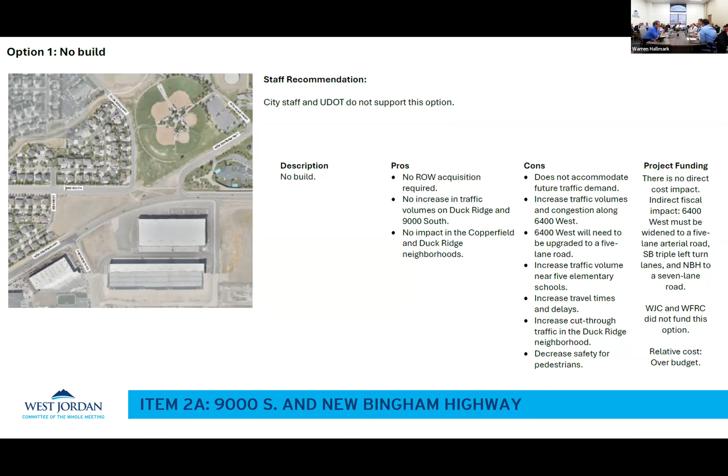And if we decided we weren't going to do it, I think it would definitely jeopardize our ability to obtain funding for other things. Well, and if it would cause problems elsewhere, they would probably be very hesitant to help fund solving the problems elsewhere. Exactly. UDOT's been counting on this connection for a long time. We would also lose our voice as to how that connection happens. Right. So, anyway, thank you. Great question.

There's some that leave it there, but I need to make clear, UDOT's standards for intersection spacing do not allow intersections that close, and they do not support one that close. And so yes, in the majority of these options, that goes away for that reason. So this would end up just being an extension of the park or whatever we did. Yeah. Okay. Any other questions on this? Thank you.

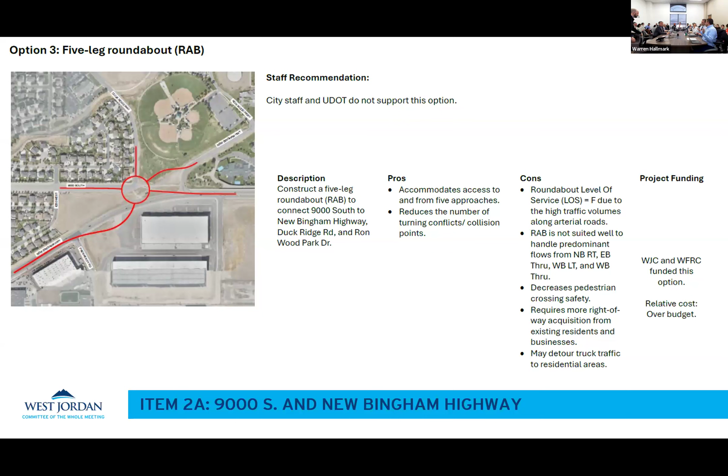So I agree though. In the right context, roundabouts are awesome. This is not the right context for that. All right. Okay, option 4. So this is actually very similar to our recommended option.

Thank you, Mayor. I do want to point out a couple things. One, obviously, this would be a little more expensive. It takes a little bit more land to accomplish. Two, a collector with driveways on it, meeting at a signal with an arterial is not an unusual thing. There's dozens of examples of that across Salt Lake Valley and many here in West Jordan itself. So to have a collector road with driveways on it next to a signal like that is not unusual. It's not uncommon, and doesn't necessarily necessitate doing something different. However, if you wanted to help appease those neighbors, this is an option.

Any questions? This is one that, and I represent this area in this report, I'm more in favor of. I have a few questions. This is the only one I really had questions on because it seemed to be in line with everything for the most part. One regarding financial. Let's say we go ahead with number 4. Are there strategies that we can work on, let's say this is approved, that would help remain financially viable during this implementation? Because you said this one was the most expensive, but it's also the one that meets.

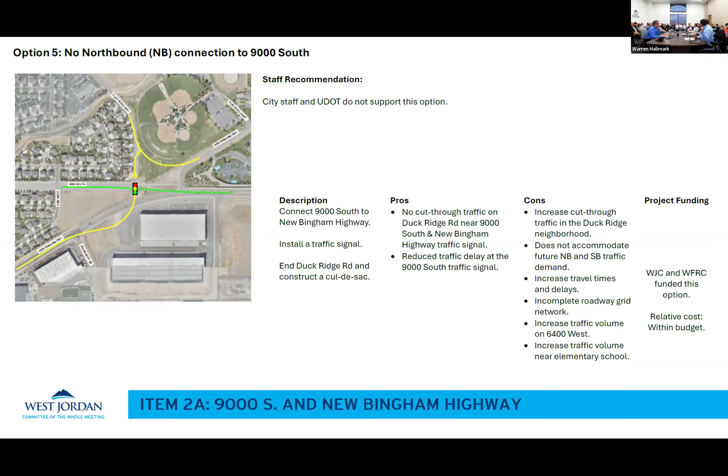Not if you're coming from the south. Right, so. Well, if you're coming from the south, it still makes sense. Well, yeah, it still makes sense to go to 86 and come in. Any other questions on this one? I know I was told I need to hurry through these, so I'm trying. Okay, I'll keep going. Option number 6.

So this cul-de-sacs Duck Ridge, but connects it over to the north end of New Bingham up through the park. There's a few issues with this. One, it puts the intersection at 90th at a skew. That's not great. UDOT doesn't support that. And what it does is it forces people to use the connection through the park. And that's where we have a lot of kids playing and crossing and going through there. And it's not necessarily what we want to encourage. And again, it cuts off that connectivity with Duck Ridge, which, as we talked about, has its own issues with cut-through. I don't think I could support this one.

So let me just clarify what you just said. We would rather put traffic on the street in front of homes than through the park. The best thing to do is provide as many options as possible so that we spread the traffic out. What happens when we start cutting things off is we condense traffic into single areas or single arterials or collectors, and that causes problems. And so when we provide options here, people can use Duck Ridge, they can use the road through the park, they can spread that out. And so not a single road is carrying all that demand. Okay.

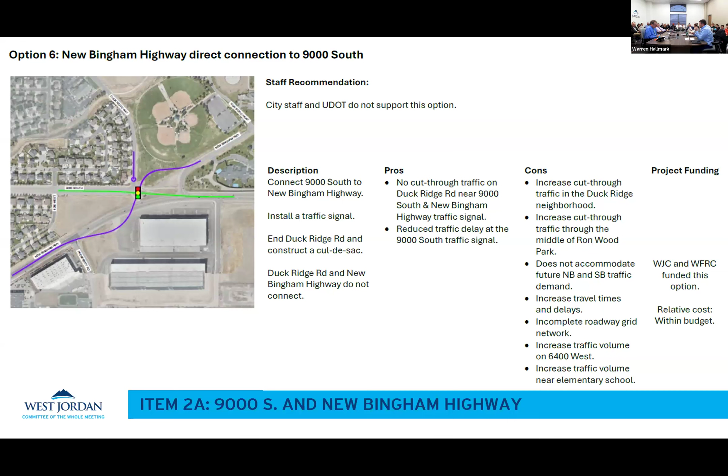Okay. This one seems very similar to 4, but I guess it has that angled intersection. It does, it has that skew. Well, what this one does is it meets to the right instead of just going through and meeting farther up. Cost-wise, between 4 and 7, this one would be more expensive. By a little, by a lot? That's a good question. Dave, you got any thoughts there? I guess it depends on your definition of a little or a lot. Well, we're already talking millions for a road, so right. A few 100,000.

Man, I don't want to be on record for throwing out a number here. But yes, I would say between probably $300,000 to $900,000. I think we need to focus more on design than cost. I mean, I understand it's always a cost issue, but we want to get the design right, and it's a one-time cost and it's forever design.

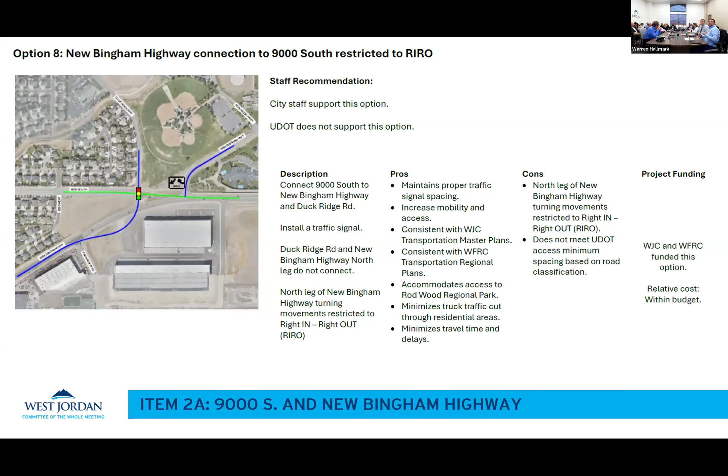Where's that at? They just created on 47th South, by all those buildings, you can get off the freeway instead of going to 47th, you can get off and get on. So it's just interesting, the rules for us, but they just created something just like that on a major highway. So anyway, let's go to the other options real quick. Yeah, we'll go through these quick.

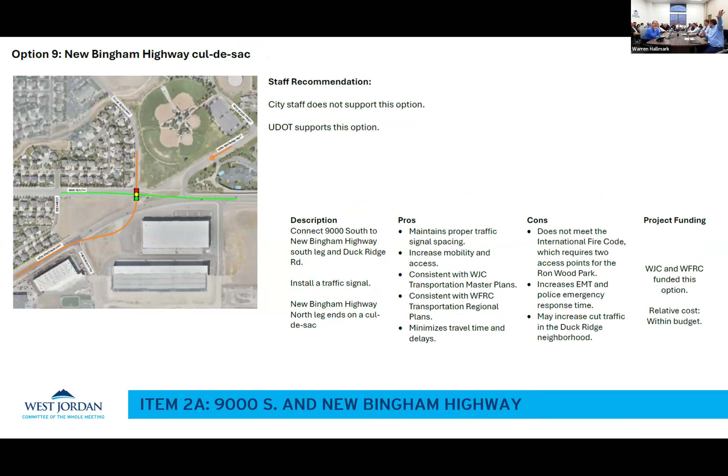What if this one was kind of combined? In other words, what if the right in, right out was at the existing right in, right out, so to speak, going into the park on Ron Wood, on New Bingham Highway, on the north side of New Bingham Highway? This one? Well, no, go back. So you put the intersection to the west like that, but cul-de-sac Duck Ridge and make the right in, right out over at New Bingham Highway, and then bring Duck Ridge over to that point. So kind of like a combination of this one and number 7.

So part of the issue here is the access spacing here with the neighborhood. That's too close, and that will not meet UDOT standards. And so that's what I'm saying. So move the right in, right out to the east one intersection. So you shift the light to the west, now you're separating it back out. He's saying that that intersection is still pretty close. He can't see where you're pointing. I know, and I don't know a better way. This is blurry. Remind me the name of this. I can't remember. I should know that.

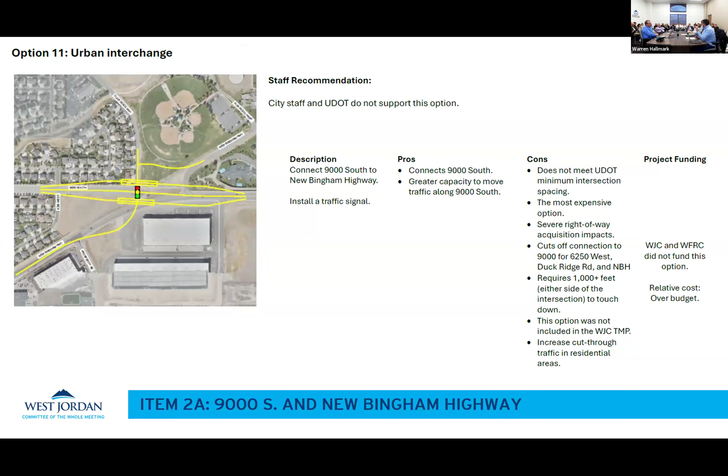Yeah. I'm not gonna spend a lot of time on this, but this is kind of an urban interchange, or grade separated with the bridge through here. This cost would be tremendous. You would be taking out homes and buildings right away. I don't think this is a viable option. And then this one similarly, we're going through that big brand new building. I just don't think this is a viable option either with the impacts here. Just making a tunnel through the building.

With enough money, I guess you can do whatever you want, right?

I have an option 13 to put up there. Alan, can you put that up? Could you, again, or you need to, you sent it to Warren, but he can't. I didn't send it. Can we just put up Google Maps or is that possible? Yeah, give me a sec here.

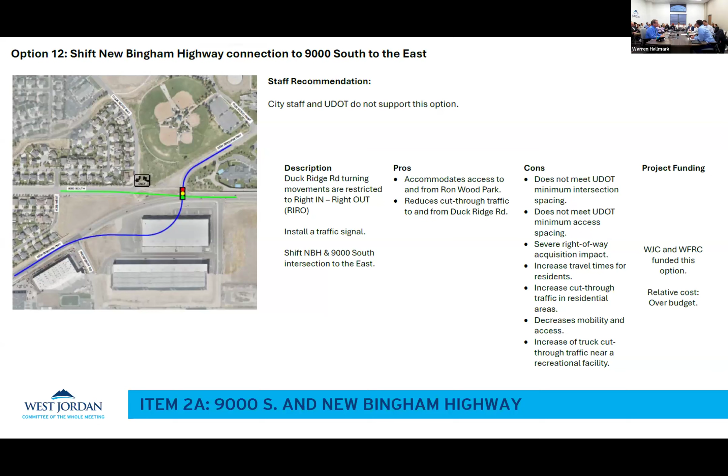So while he's getting the Google Maps up, in St. George, there is an intersection of Bluff Street and Sunset. And for years, it was a horrible T section. They have fixed it now. And what it's done is it has helped traffic really move smoothly from Bluff to Sunset, and also for those who are going north from Bluff up to the north part of the area. So it's a great intersection. I've driven by it many times and it flows really well.

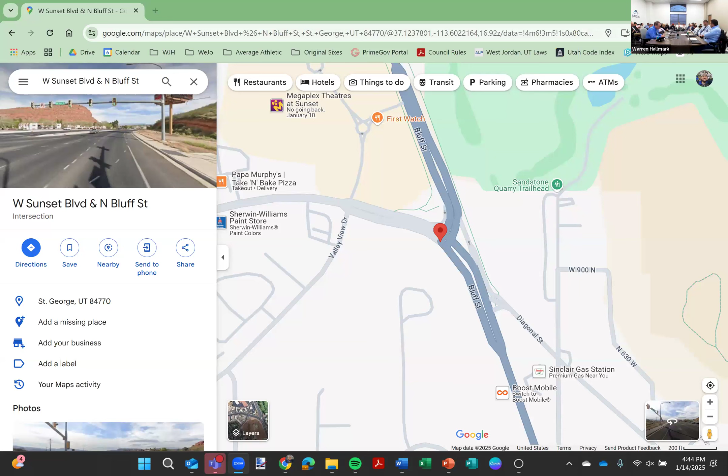And I think it would work well here because my worry is we have this highway that's going to be a freeway pretty soon with bridges and interchanges, right? All of the truck traffic comes off 90th and it's gonna make a left turn to head towards New Bingham and all the warehouses out there. So we're gonna have a lot of trucks backing up on 90th.

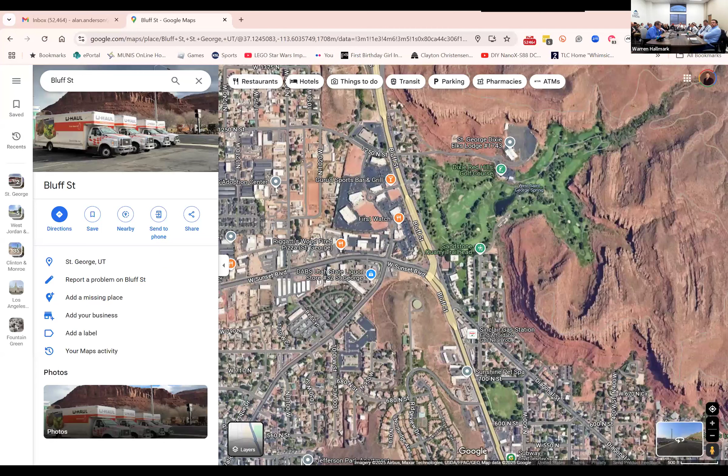And so what I'm showing you here is this Bluff Street to Sunset. What they've done here is they've still kept that connection, kind of like our 90th to New Bingham. But then they've also made a straight through on Bluff Street, so people that are heading, in our case, they'd be heading west, can still keep going without stopping. What it does, however, is it does slow down traffic coming from our west 90th, where they have to stop there.

My biggest worry is the truck traffic is not gonna stop. Amazon's out there, all the manufacturers are out there. All those big trucks are gonna stop to turn left. This will make it so that the traffic still flows. It will slow down 90th coming from our west side, but it will keep traffic flowing from 90th heading east towards the homes at night.

Now, I don't know where we're at. I did send this to the mayor a few months ago. Obviously, it never got to you, and I don't know why. Obviously, I'm not a traffic engineer, and I don't know the rules of UDOT because they can do something somewhere else, but they can't do it here. This is gonna be forever, like this intersection. And if it's bad, we're gonna change it anyway.

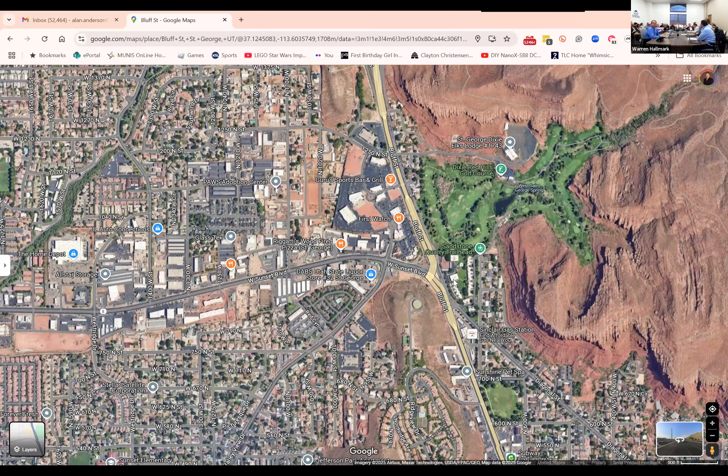So this intersection was designed by UDOT, I believe. So someone's got the design somewhere, and I know there is a cost involved because it will cost more to create something like this. But in the long run, this is gonna make traffic flow better, and it's gonna make New Bingham not a danger. So great idea. I love it when we have great ideas come in. So let's talk about this one for a minute.

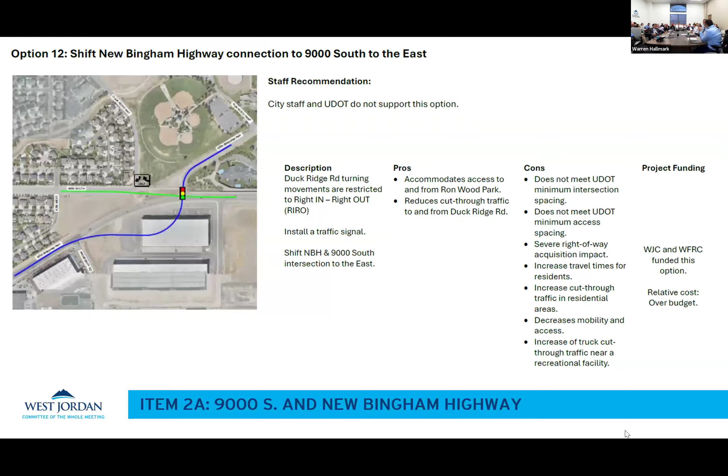One of the reasons that you may realign an intersection like this is you want your heaviest movements to be the through movements. Where you start to run into problems is when your heaviest movements are left turns. Those create big issues, and that's where you start to see intersections like CFIs or interchanges or other kind of crazy or innovative ideas, right? This one, what happened here is traditionally Bluff Street was the road, right? You can see where that traditionally was.

Until growth came. All the growth came, right? And so everybody wants to do this movement. And as much as you try to accommodate that many left turns, you can't. And so they realign this to make that movement. And then this becomes what I'll call the minor leg. Right. Well, what we have in our situation is 90th South is the major leg in the future. Oh, I agree. Right now it's not, right?

So right now everyone uses New Bingham, right? And they're making that curve. But in the future, the east-west on 90th is the main flow. And so that's the one we want to be the through movement. Okay, and so rather than swinging everybody down to New Bingham, we want them to be the through. But see, we've already got that problem on 78th.

And like I said, I'm not a traffic engineer, but I've driven that road. 78th backs up to turn left. And if you're not watching, you're gonna slam into the back of somebody. There's no signal there yet, which I'm sure we're talking about. And also for those that are turning left, they can't turn left because of all the traffic coming from the east. So I'm just trying to find a way to make it so that New Bingham, I feel like all of the 12 options cut off New Bingham, cut off all the truck traffic.

And with the intersection being where it's at with the new Mountain View corridor, everyone's gonna be getting off there and heading up New Bingham. So I understand your concern, and there's certainly a heavy movement that does that to New Bingham, right? No question. One of the things that you'll see is we do have a free right northbound, so they can come up and make a free right toward Mountain View. And then we have dual left turns so that they can turn on to New Bingham.

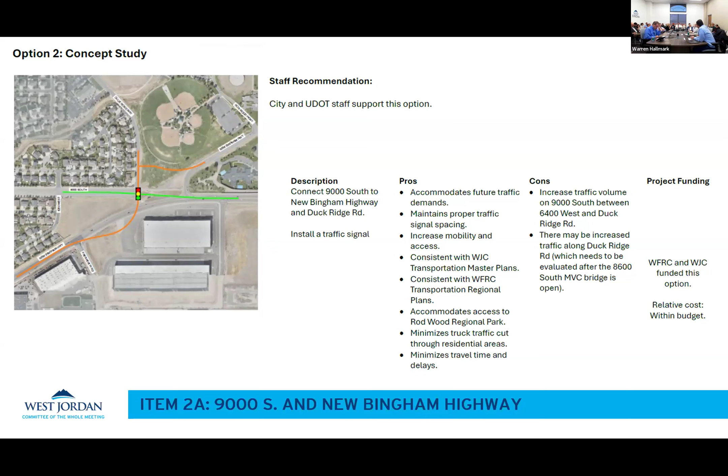As far as the options go, then, from the council, what do you need from us today? I mean, obviously, there's 7 different opinions, and I don't think you really have a for sure opinion on which ones. What option? Well, I think I heard option 4 being the most supported. Who would support 4 is the question. I could support 4. He'd be fighting the multiple votes. I don't like any of them, so no good for me to do more votes.

I mean, honestly, I think the concept of your idea would have like a flyover bridge, if money was just growing on trees. But it's not. Would the bridge be open on time? Well, that depends. So the through street would be Bluff Street, and then a flyover bridge that would take over and then into Sunset. We'd like that on 78th. We'd like that down lower on 90th onto Old Bingham. I mean, there's 100 places where we could do that. I just think that the truck traffic was part of when you guys did these options. I think it was just about traffic flow on 90th, and that's my disappointment.

Are we anticipating Amazon to continue to use New Bingham? Oh, yeah, they will. Or are we anticipating them going to 90th? No, they'll go from Bingham. And we understand the truck traffic's really high out here. We counted them. There's a lot. We designed it so that we have good turning radii for these large trucks to make these turns and get through here. I understand the concern. My biggest concern is just the ones turning left, because that's a lot of truck traffic. It is. Those are big vans.

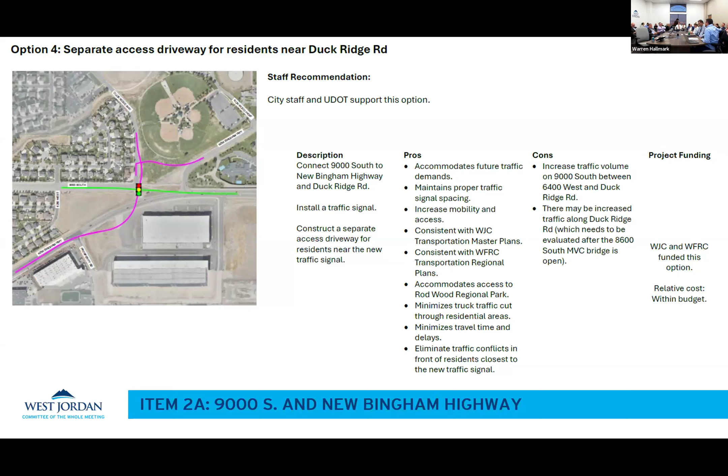If 4 seems to be what most people have, okay. I did like 7 for that reason as well. I mean, that's the best thing. I could support 7 also. You have to take a left turn just to say, I want to go into that neighborhood. But that also might be the turn that's going to take them to the rec center.

So those are the things we have to kind of consider. But 4 and 7 were my favorites from the beginning. And it really affects, in a way, the at-large and Kent the most. So you 4 were going to be the ones we're going to be kind of leaning towards the most. And we're the ones that said yes.

Yeah, that's what I was like, well, yeah. Bob doesn't need to talk. So why won't... Well, thank you.

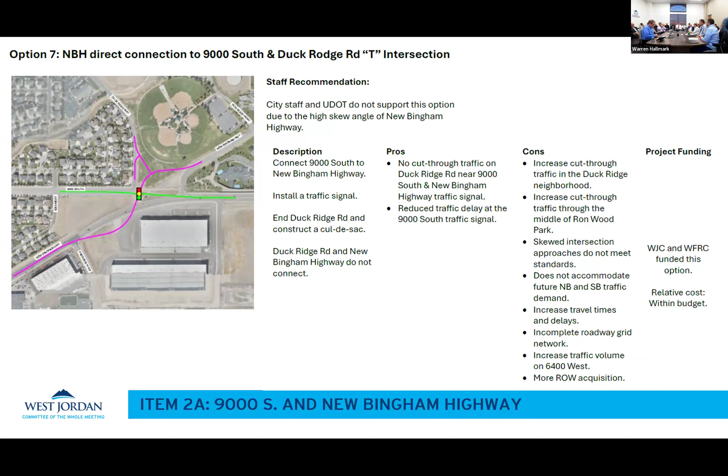All right, thank you. We will close discussion topic number A and move to discussion B, the presentation of proposed form-based zoning, Corridor Zone CZ. Redwood Road. Taylor, you're up.

Thank you guys. Get it all queued up. We've heard the council this past weekend. We worked hard over the weekend, and no, I'm just kidding. Hopefully this aligns with what the council was talking about in part with form-based. And we're anxious to hear your thoughts.

Yeah, thank you. This is much more interesting than the last one. You're looking for the fun one. Can you believe it? Pretty pictures and everything. I would take it personally if I were. I do. You know how to clear a room, Taylor. I love it. It's a super power. Would you like to chair or? Yep, go ahead. Okay, so... You got 5 minutes. Just kidding, go ahead.

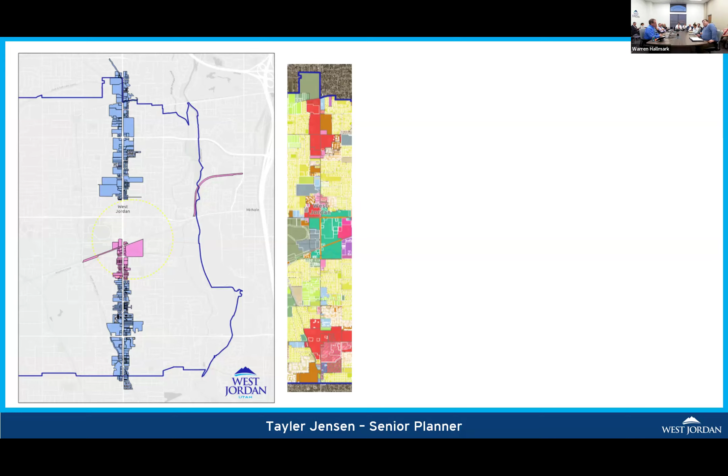So what we are requesting to do is twofold. First, we would add the corridor zone as an exception to the balanced housing chapter of the code. And second, this would create a new form-based ordinance that can only be applied to Redwood Road. This would not be an overlay zone, so anyone that wanted to use it would actually have to rezone their property to this. Most likely, they would have to change the future land use designation as well to medium or high density residential, depending on what they wanted to do. Because of the nature of the zone, we'd also require a master development plan agreement with every rezone.

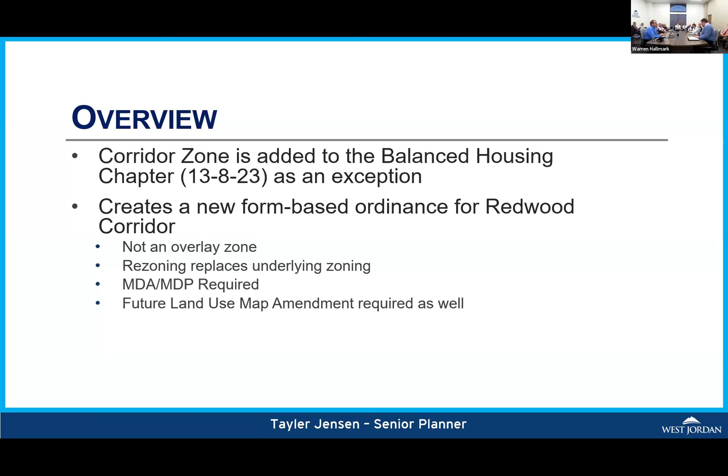It is a form-based code, but it's hybrid, as a pure form-based code just looks at the building and doesn't look at the uses of the zone at all. This still does have a use table, so that's why we're considering it a hybrid. It's focused mainly on appearances, but we also limit it in its scope to certain uses.

As mentioned, this would only, as currently drafted, be available along Redwood Road. In the original draft, we had considered allowing this to also be used along 90th, 78th, and 70th, but we felt like that might have been a bridge too far. If it works on Redwood Road, maybe we can refine that and come back and add those to the corridor zone designation at some point in the future.

As mentioned, this would be governed by an MDA. And rather than look at maximum densities, we wanted to look at floor area ratios. What is a floor area ratio? Yeah, that's the next slide. So floor area ratio is essentially a way of calculating the size of a building. And we'll just do basic numbers.

If you have a 10,000 square foot lot and your floor area ratio is 1, that means you have 10,000 square feet of building space. So if you're doing half of that as parking, then you need to do 2 stories for 5,000 square feet. So here we can see floor area ratio of 1. If you're covering the whole lot, whole lot's built. If you're only covering a quarter of the lot, you have to do a 4-story structure.

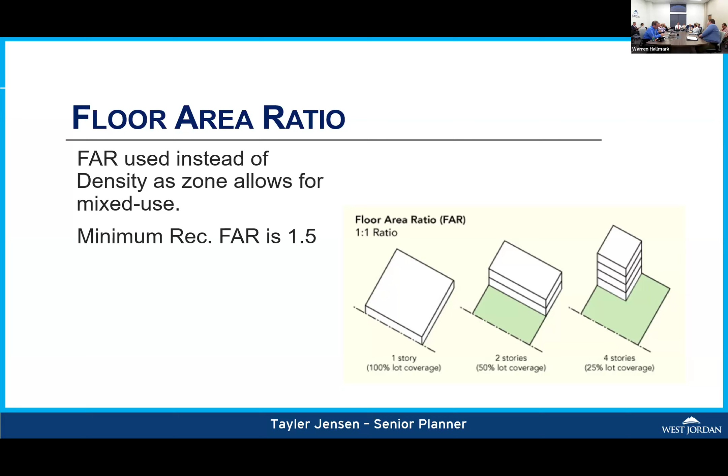I want it so that when people drive into West Jordan, they have a sense that they're here. It's a community. Not here's an old looking building, here's a very modern looking building, here's this other building. It just doesn't create a sense of place if every developer comes in with a different look. I understand that, and so there are requirements, maybe not in the PowerPoint, but in the design standards for the ordinance. When I looked at your graphics, I just thought we were creating a bunch of different looking communities. Sure, we can change the graphics.

Like if I go to Boston, I know I'm in Boston because they're all red brick and they're all a certain look. If I go to San Francisco, I know I'm there. Midvale, you know what the look is. And if I'm now going on Redwood in South Jordan, I'm seeing a similar kind of build. And I didn't get that from the packet, and that concerns me. Yeah, okay, that's valid, and we purposely used different types of elevations. These are examples, they're all ones we took from Utah and the Wasatch Front.

Now the standards that are in there, we have fenestration, so that's transparency on the first floor, second floor, third floor, upper floors. We have ground level details that are required. Entrances need to have certain architectural features, so we have some frameworks, but I didn't want to come in here saying we're going to do mid-century modern, or Art Deco, or Western mining town, because I don't know that I am the proper person to come up with that.

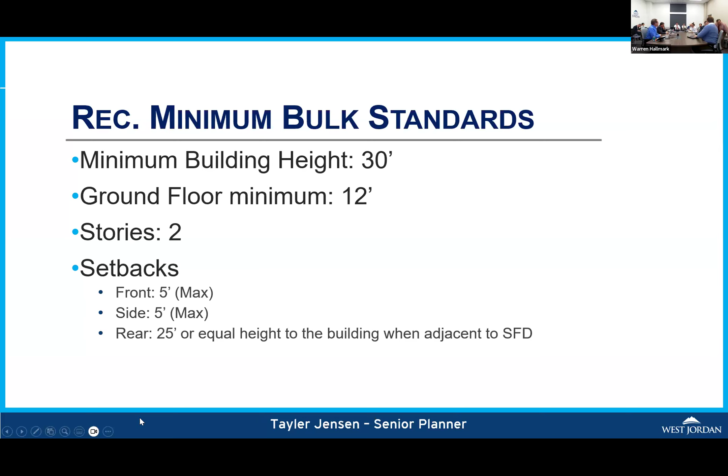All right, we've got a 6:30 cutoff. I don't think we'll have time to finish all. No. We have 3 more. Oh, wow. So let's get through the discussion of council members on external boards. You want to bring that up, Alan? And then if we have time... Yeah, we just might move the council compensation to the next meeting. So I think we could do this fairly quick.

So before we start, Kent asked me the question, how does this work? You know, it's the second year he's been here. So my thoughts are, if you want to stay on, great, but if you want to be on a board you haven't been on, we can put it out there. For instance, I'm on Chamber West. I've only been on there a year. I feel like I barely got all my ducks in a row there and want to do another year. But is there someone else who wants to be on it as well?

But that occurred last year too, when I wanted to stay in some of my positions. I had only been there a year and I got off because we had new people, so I can't totally support that. Well, I didn't say that's what we were doing. I was just mentioning that. I know, but I'm just saying that there's another side to that.

Okay, so what we can do is start at the top. LPC, the mayor is on the executive committee, and so the council has a voting position on LPC. And they meet the second Mondays at noon when the legislature's not in session, and they meet weekly during the session. And this one is a set, or no, I'm sorry, we have two council members. They're voting, they cannot be switched.